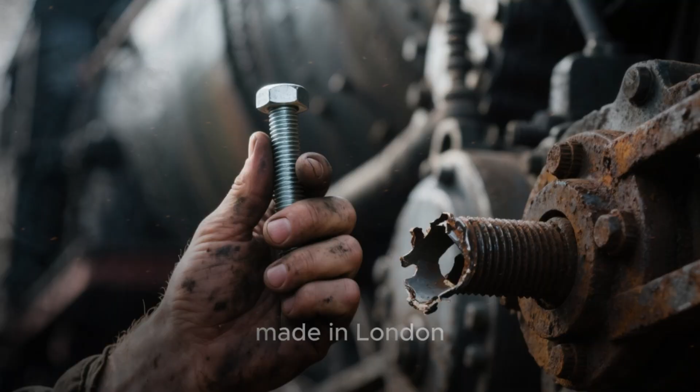Imagine a world where nothing fits. It's 1830. A steam locomotive breaks down in a remote village. The engineer reaches for a spare bolt, but it's useless. His bolts were made in London. The engine was built in Manchester. In this era, every screw was a unique work of art, which made the industrial world a logistical nightmare. This is the story of how we traded that artistic chaos for the beautiful, sleepy comfort of the standard.

Before we dive into the dusty archives of the 1841 Whitworth proposal, I want you to settle in. Imagine the sound of a heavy iron lathe in a workshop in 19th century England. The steady, rhythmic shaving of metal. The smell of oil and cold steel. We are going to slow down time, one thread at a time.

Picture this. You're building that new bookshelf and a screw is missing. No problem, right? You just run to the hardware store and grab a new one. But imagine a world where that simple trip wouldn't solve your problem. A world where every single screw is one of a kind. Welcome to the early 19th century, the era of what we'll call mongrel threads. Before 1841, standardization as we know it was basically science fiction.

If you were a blacksmith or a mechanic, you didn't just make a machine. You made every single bolt, nut, and screw that went into it. Each workshop was its own little kingdom, with its own unique system for creating fasteners. Your screws were your signature, and they wouldn't fit anything made by the guy in the next town over, or even the guy across the street.

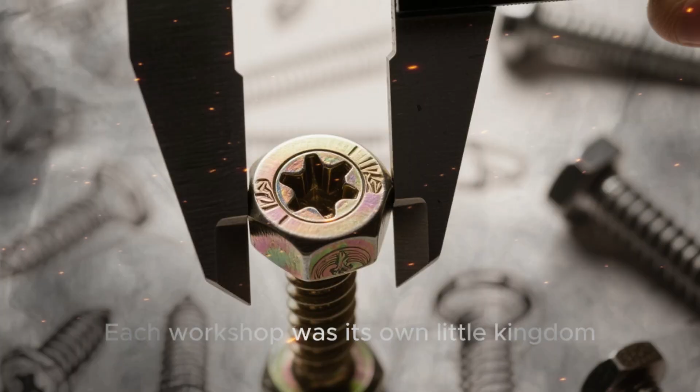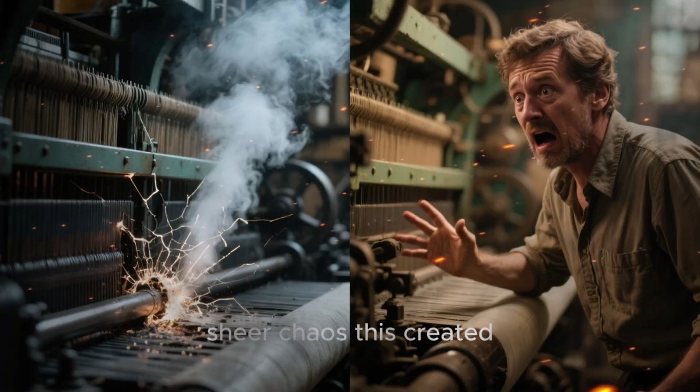Think about the sheer chaos this created. Let's say you're the proud owner of a brand new steam-powered loom. It's a marvel of engineering, weaving cloth faster than ever before. But one day, with a loud snap, a critical bolt breaks. The machine grinds to a halt. Your entire operation is down. What do you do? You can't just order a new replacement part. There's no catalog, no part number.

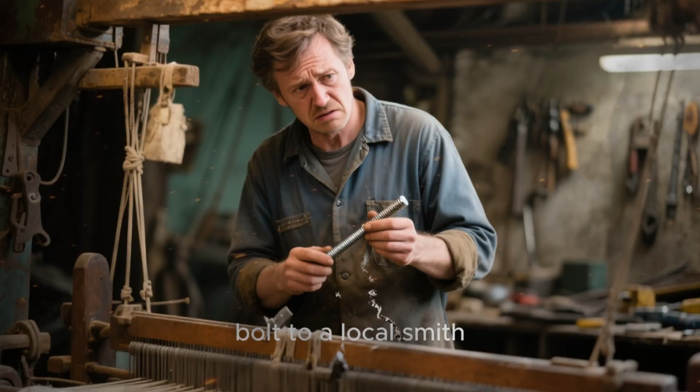Your only option is to call the original machinist who built the loom. If he's still in business, and if he's not too busy, he might be able to make you a new one. But more likely, you'd have to take the broken bolt to a local smith. This craftsman would then have to painstakingly measure the hole, guess the thread pattern, and hand file a brand new bolt from a solid piece of metal. This wasn't a quick job. It could take hours, even days, of meticulous labor, all while your expensive machine sits idle, losing you money every second. This was the quiet, inefficient world of custom everything.

Interchangeability was just a dream. Every repair was a custom job. Every machine was an island, filled with unique components that had no twins anywhere else in the world. Now, expand that problem to a national scale. The Industrial Revolution was in full swing. Railroads were stretching across the country, connecting cities and transforming economies. A locomotive was an incredibly complex machine, made of thousands of individual parts, including countless bolts and screws.

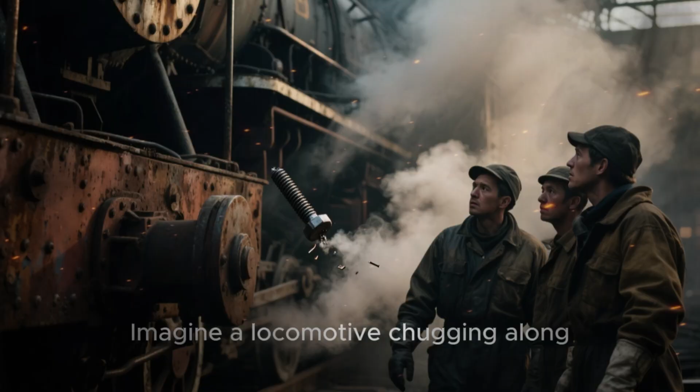Imagine a locomotive chugging along, hundreds of miles from its home workshop. A bolt rattles loose and falls off. Or worse, it shears under the immense pressure. The engine is crippled. The crew is stranded in the middle of nowhere. What's the plan? They can't just radio for a spare part to be sent. Even if they could, the spare part from another locomotive wouldn't fit.

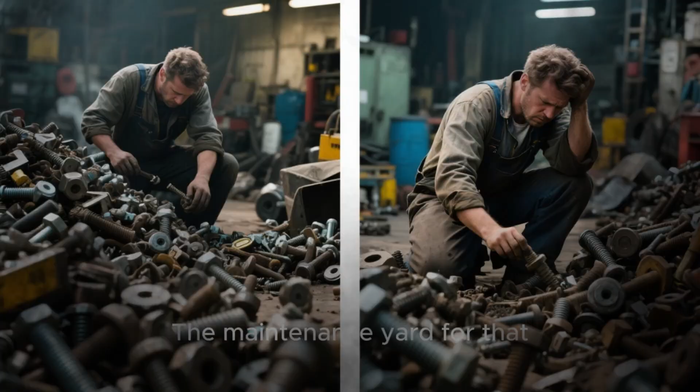The maintenance yard for that railroad would be a logistical nightmare. Instead of bins of standardized bolts, they'd have a massive, disorganized collection of custom-made fasteners from every locomotive they owned. When a repair was needed, a mechanic would have to sift through this mountain of metal, hoping to find a close match. And if they couldn't find one, you guessed it, they'd have to fire up the forge and make a new one from scratch.

The dream of a truly connected industrial nation was being held back by something as small and seemingly insignificant as a screw thread. This problem wasn't just limited to big machines like trains and looms. It affected everything, from scientific instruments to household clocks, from firearms to farm equipment. If something broke, fixing it was a massive ordeal.

There was no shared language of mechanics, no universal standard that allowed parts from one place to work in another. The world was filled with these mongrel threads, a chaotic mix of shapes, sizes, and pitches. Each one was an invention of necessity, born in a specific workshop for a specific purpose. While this system showcased the skill of individual craftsmen, it was horribly inefficient on a larger scale. It stifled innovation, complicated repairs, and made mass production almost impossible.

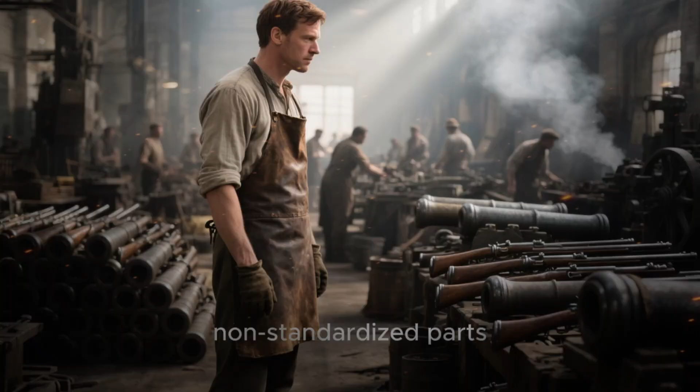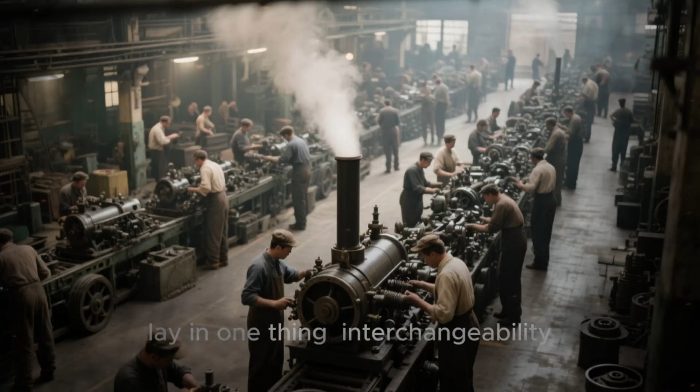He started his career at the Royal Arsenal, where he saw firsthand the chaos of non-standardized parts. Imagine trying to repair a cannon or a musket in the heat of battle, only to find that the replacement screw doesn't fit. It was inefficient, it was frustrating, and for Maudslay, it was an engineering problem that simply had to be solved. He knew that the key to mass production, the key to a modern industrial world, lay in one thing: interchangeability. And the key to interchangeability? The perfect, repeatable, identical screw thread.

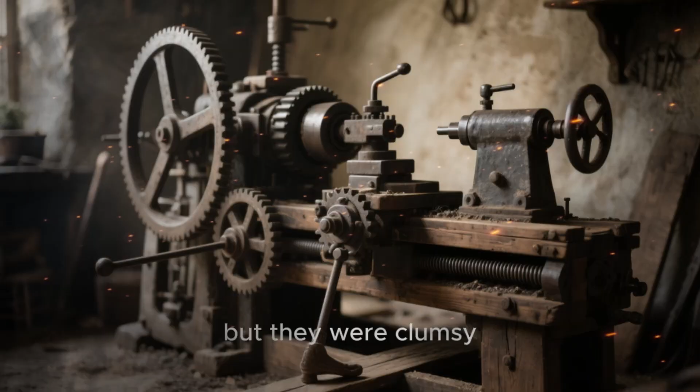But how do you create identical threads? You can't do it by hand. The human hand, no matter how skilled, will always introduce tiny imperfections. One craftsman's fine thread is another's coarse. What Maudslay envisioned was a machine that could cut threads with unwavering mathematical precision. The existing lathes were a start, but they were clumsy. The cutting tool was often held by hand, guided by sight and feel alone. It was more art than science.

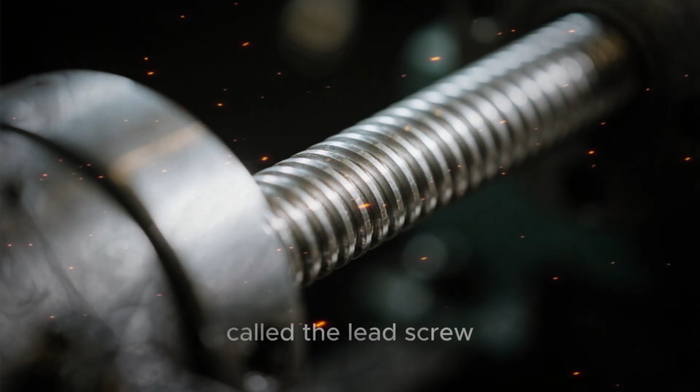Maudslay's genius was to take this existing technology and perfect it, transforming it into a machine of unparalleled accuracy. His creation, the screw-cutting lathe, is one of the unsung heroes of the modern age. Let's break down what made his lathe so special. The heart of the machine was something called the lead screw. This was a master screw, crafted with the utmost care, that ran the length of the lathe bed.

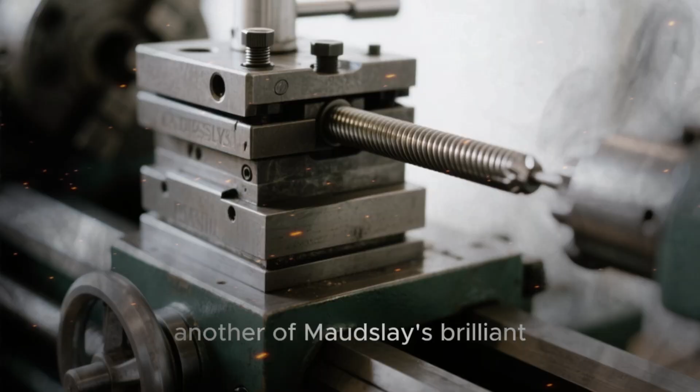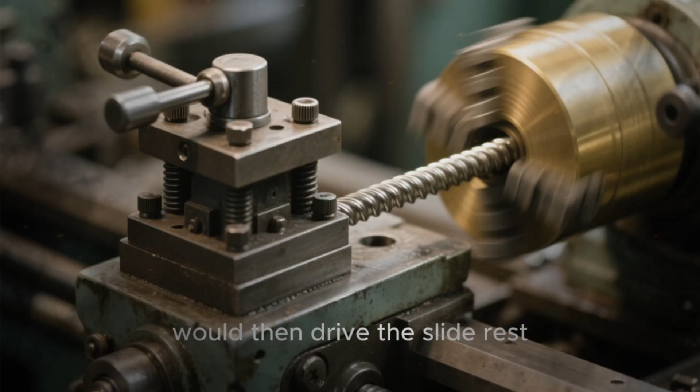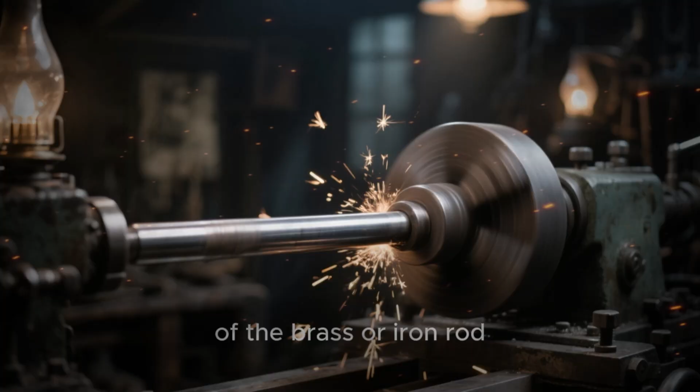Connected to this lead screw was the slide rest, another of Maudslay's brilliant innovations. The slide rest held the cutting tool in a rigid, unyielding grip. As the main spindle of the lathe turned the piece of metal you wanted to thread, a set of gears would turn the lead screw at a precise, related speed. This rotation of the lead screw would then drive the slide rest and the cutting tool steadily and smoothly along the workpiece. Picture it. The rhythmic hum of the machine, the steady rotation of the brass or iron rod, and the slide rest, moving with a slow, meditative, almost hypnotic grace.

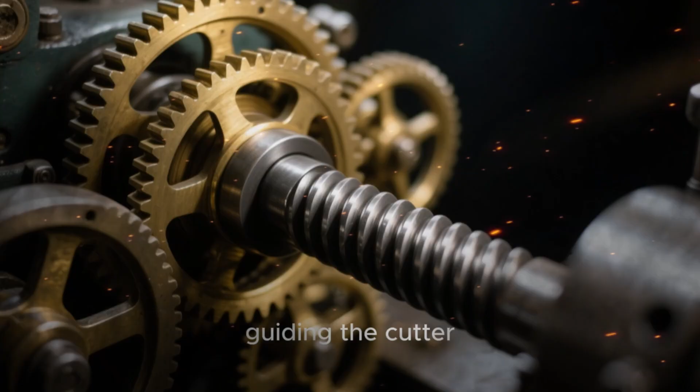It wasn't a human hand guiding the cutter. It was the cold, hard logic of gears and the perfect geometry of the lead screw. With each pass, the tool would bite into the metal, carving a helical groove. Another pass, a little deeper, and another. The result was a thread not born from estimation, but from calculation. A thread that was a perfect physical manifestation of a mathematical ratio.

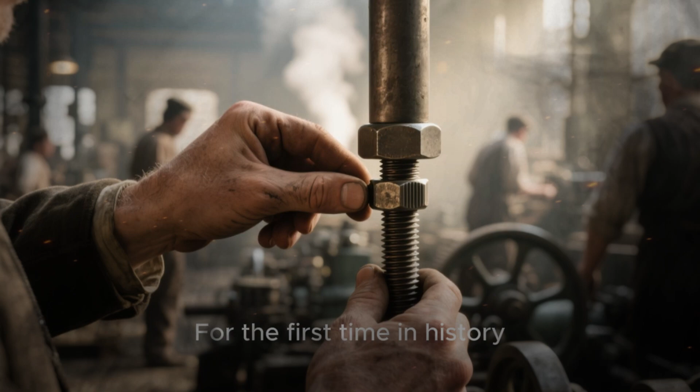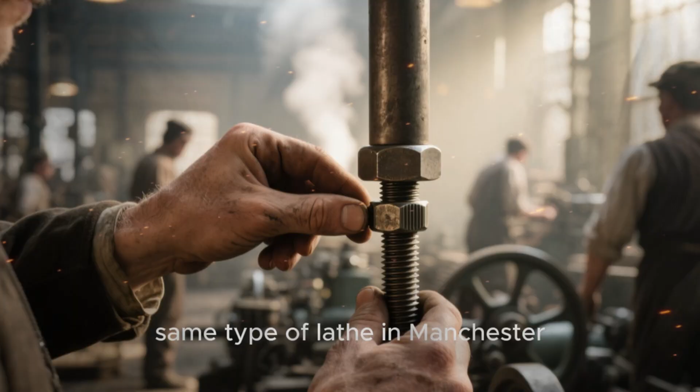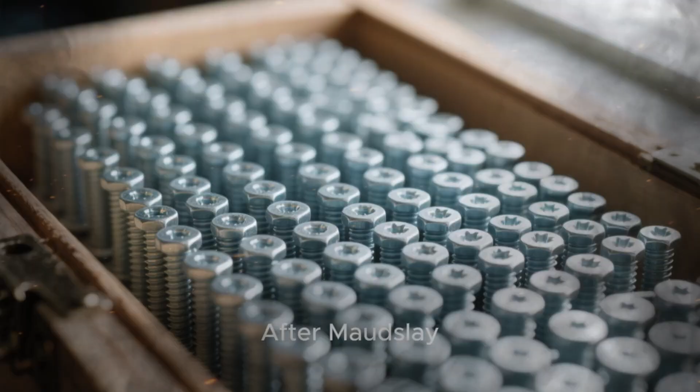For the first time in history, you could produce a screw in London and know with absolute certainty that it would fit a nut made on the very same type of lathe in Manchester, or Birmingham, or even one day across the ocean. This was the birth of consistency. Before Maudslay, every screw was an individual, a one-of-a-kind piece. After Maudslay, the screw became a commodity, a standard component.

The implications were staggering. Think about it. Suddenly, you could build complex machines with replaceable parts. A steam engine, a printing press, a textile loom. If a part broke, you didn't have to custom fabricate a new one. You could simply order a replacement. This dramatically lowered the cost of manufacturing and repair, and it accelerated the pace of innovation like nothing before.

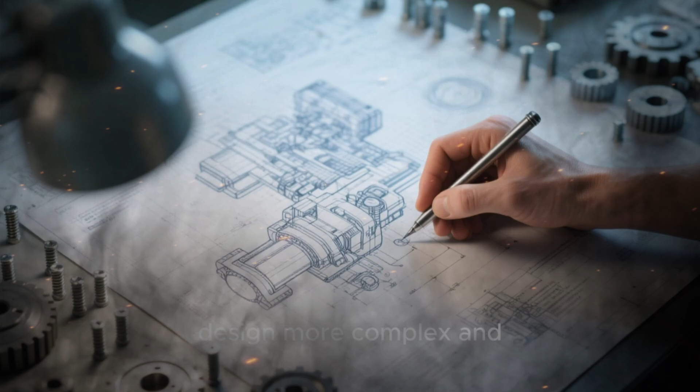Inventors and engineers were now free to design more complex and ambitious machines, knowing that the components to build them could be reliably produced. Maudslay's workshop became a legendary training ground for the next generation of engineers. Men like Joseph Clement and the great Joseph Whitworth passed through its doors, learning the gospel of precision from the master himself. They took Maudslay's principles and built upon them, further refining the machines and, crucially, beginning the push for a national and eventually international standard for screw threads.

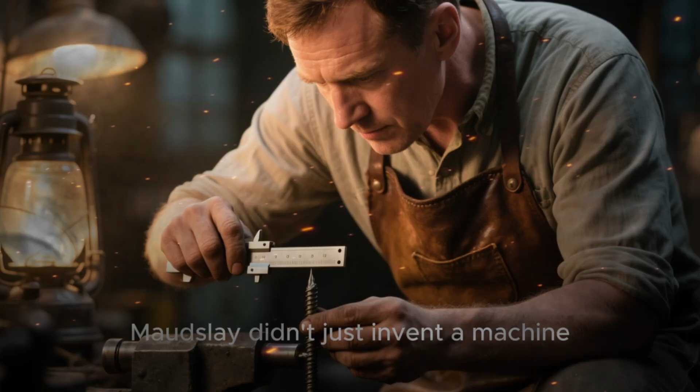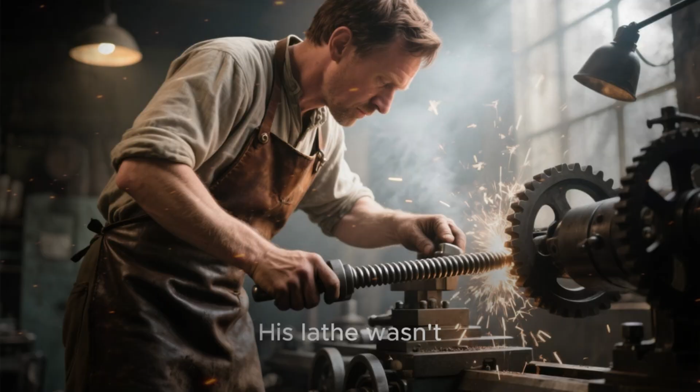Maudslay didn't just invent a machine. He created a new way of thinking. He instilled a culture of precision that became the bedrock of the Industrial Revolution. His lathe wasn't just cutting metal, it was carving the shape of the future. It was a quiet revolution happening not on a battlefield, but in the noisy clatter of a workshop, one perfect thread at a time. This new capability, this power to create perfect, interchangeable threads on demand, set the stage for the next great chapter in our story.

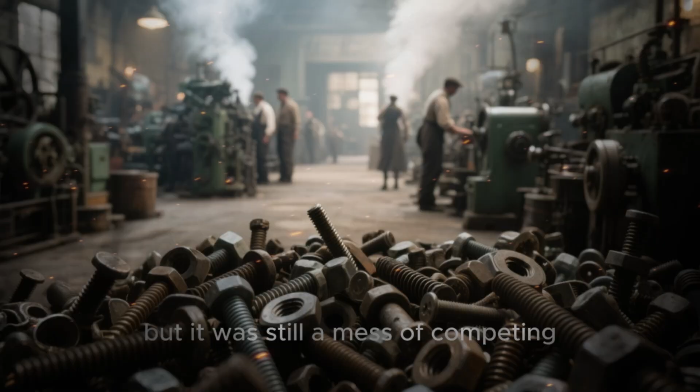With the how now solved, the question became what? What size should the threads be? What angle? What pitch? The world had a tool for creating order, but it was still a mess of competing proprietary thread designs. The battle for standardization was just beginning, and it would be a hard-fought one.

Alright, so we've established that the world before standardized screws was a chaotic mess. Every workshop, every craftsman, was basically making it up as they went along. Bolts from one place wouldn't fit nuts from another, and repairs were a total nightmare. The Industrial Revolution was revving its engines, but it was being held back by this tiny yet massive problem. The world was crying out for a hero, a champion of standardization, and it found one in a man named Joseph Whitworth.

Now, picture this. It's the 1830s. Steam trains are starting to crisscross the English countryside. Factories are belching smoke, and the world is changing faster than ever before. In the middle of all this, Joseph Whitworth, a brilliant toolmaker and engineer, decides to take on the screw problem. But how do you even begin to standardize something that has infinite variations? You can't just declare, my screw is the best screw. You need data. You need evidence.

So Whitworth embarked on what must have been one of the most mind-numbingly tedious, yet incredibly important, quests in engineering history. He began a grand tour of England, visiting every major workshop he could find. He wasn't there to admire the machinery or chat with the foreman. He was there on a mission. He was there to collect screws. Just imagine him walking into a bustling factory, a place of intense heat and noise, and saying, "Good day, sir. I'm here to take a sample of your screws." He probably got some very strange looks.

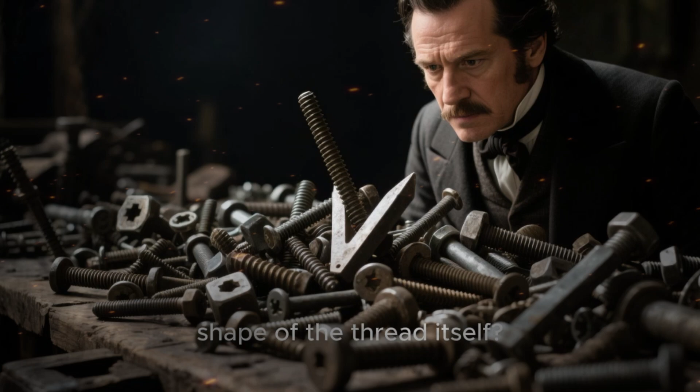But what about the shape of the thread itself? The angle of that V-groove? This was another area of total chaos. Some threads were sharp and pointy. Others were more rounded. Sharp threads were weak and easily damaged. Square threads were stronger, but much harder to make. Whitworth needed a compromise, a shape that was both strong and relatively easy to manufacture with the tools of the day. Again, he turned to his mountain of data.

He measured the angles on all his sample screws. The angles were all over the place. 45 degrees, 60 degrees, anything you can imagine. After measuring and analyzing countless threads, he calculated the average, and the number he landed on was 55 degrees. It wasn't a nice round number like 60, but it was what the data told him. The 55-degree angle was the sweet spot.

To further improve the design, he made one more crucial tweak. Instead of having the V-groove come to a sharp point at the top and bottom, he rounded it off. This was a masterstroke. A sharp point is a natural weak spot, a place where a fracture is likely to start. By rounding the crest and root of the thread, he made the entire screw significantly stronger and more resistant to stripping and damage. It also made them easier to make, as cutting a perfect sharp V is much harder than cutting a slightly rounded one.

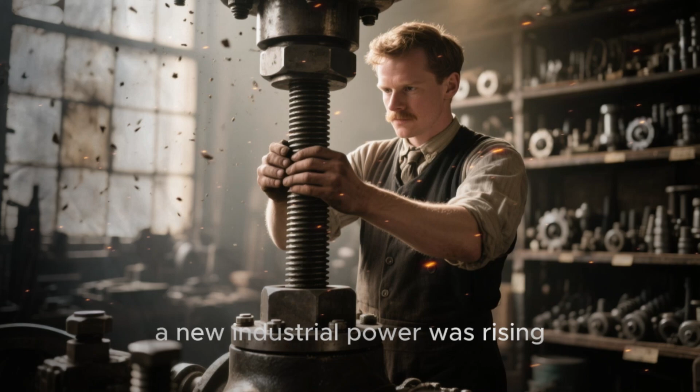For the first time in history, a mechanic in London could be certain that a half-inch nut would fit a half-inch bolt, regardless of where either part was made. It was a revolution. It streamlined manufacturing, simplified repairs, and dramatically increased the reliability of machines. Joseph Whitworth hadn't just invented a screw thread. He had introduced a new way of thinking, an idea that components could and should be interchangeable. And this idea would go on to change the world in ways even he couldn't have imagined. But while Britain was busy standardizing, a new industrial power was rising across the Atlantic, and they had their own ideas about how to make a screw.

And that's where our story will go next. You know, for something we see every day, screws have a surprisingly dramatic and opinionated history. We talked about the birth of standardized threads.

Now, we're diving into the great international screw thread debate, the Battle of the Angles. It's the British versus the Americans, 55 degrees versus 60 degrees. This might sound like a tiny detail, but this 5-degree difference tells a story of national pride, industrial philosophy, and a quest for perfection. So grab your calipers and let's get into the nitty-gritty of screw thread geometry.

On one side of the Atlantic, we have the British and their champion, Joseph Whitworth. As we discussed, his system, established in 1841, was the world's first national standard. The defining feature of a Whitworth thread is its 55-degree flank angle, with rounded roots and crests. Think of the thread profile as a series of rolling hills.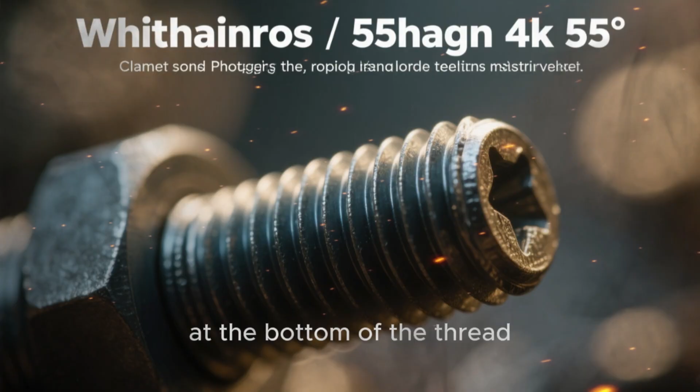Whitworth's reasoning for this was brilliant. The rounded design was meant to reduce stress concentrations at the bottom of the thread, making the bolt stronger and less likely to crack under pressure. It also created a tighter seal, which was fantastic for applications involving steam or fluids, a huge deal in the age of steam engines. The rounded tops and bottoms were also less prone to damage during handling and assembly.

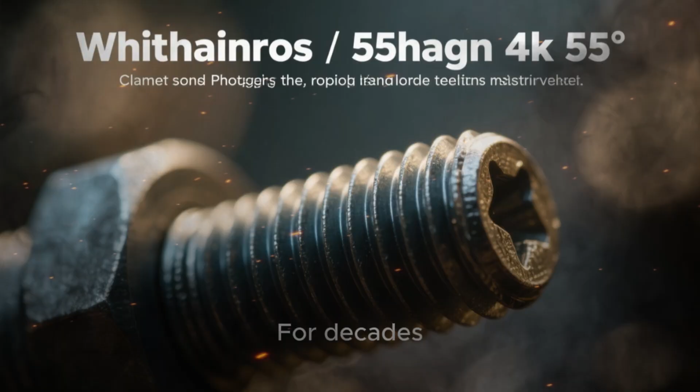It was a robust, well-thought-out design that quickly became the standard not just in Britain, but across much of the world. For decades, if you were building a bridge, a ship, or a locomotive, you were likely using Whitworth threads. It was the undisputed king. But as with all great empires, a challenger was rising in the West.

Across the pond, American industry was booming. They were initially using a chaotic mix of threads, including Whitworth, but a desire for a uniquely American system was growing. Enter William Sellers. In 1864, he presented his own thread standard to the Franklin Institute in Philadelphia. His design was different in a few key ways.

Most famously, it featured a 60-degree flank angle. Instead of rounded tops and bottoms like Whitworth's, the Sellers thread had flat crests and roots. The profile looked more like a series of trapezoids than rolling hills. Now, why the change? Was 60 degrees inherently better than 55? Not necessarily. The real genius of Sellers' design was its manufacturability.

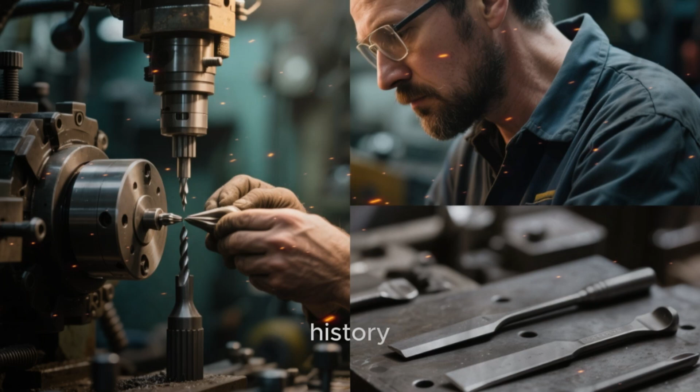This is where we get into what some might call boring history, but I think it's fascinating. It's all about the machinist on the factory floor. To cut a Whitworth thread with its precise, rounded profile, you needed special tooling. Creating those rounded cutting tools was a skilled art form in itself. It was time-consuming and required a high level of craftsmanship.

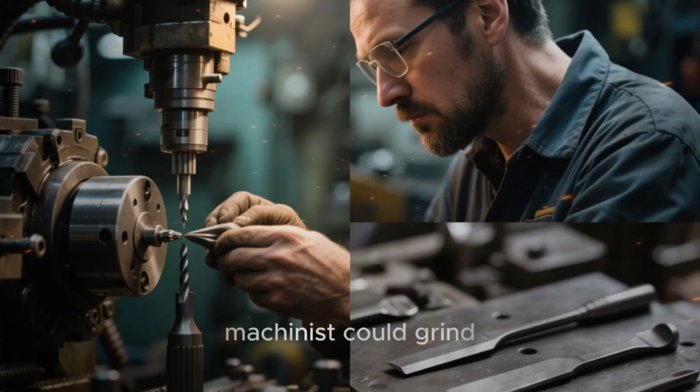William Sellers looked at this and thought, there has to be a simpler way. His 60-degree angle with flat tops and bottoms was a game-changer for production. Why? Because you could create the cutting tool with simple, straight-sided geometry. Any competent machinist could grind a tool bit to a perfect 60-degree point. It was easier, faster, and cheaper to produce.

This wasn't just about a different shape. It was a different philosophy. Whitworth prioritized the theoretical strength and sealing of the final product. Sellers prioritized the ease and economy of making that product in the first place. This focus on mass production was quintessentially American. It was a system designed for a rapidly industrializing nation that needed to make things quickly and efficiently.

So the stage was set for a showdown. The British system, with its 55-degree rounded threads, was the established global standard, celebrated for its strength and reliability. The American system, with its 60-degree flat-top threads, was the up-and-coming challenger, designed for speed and ease of manufacturing.

This wasn't just an engineering debate. It was an economic and philosophical one. On one hand, you have the meticulous, craft-driven approach of the old world. On the other, the pragmatic, production-focused mindset of the new world. And for nearly a century, these two systems would compete, coexist, and cause endless headaches for anyone trying to repair a British car with American tools, or vice versa.

The incompatibility was a massive problem. Imagine being a mechanic and having two sets of wrenches, two sets of taps and dies, and two sets of fasteners that looked almost identical, but were fundamentally incompatible. It was a logistical nightmare.

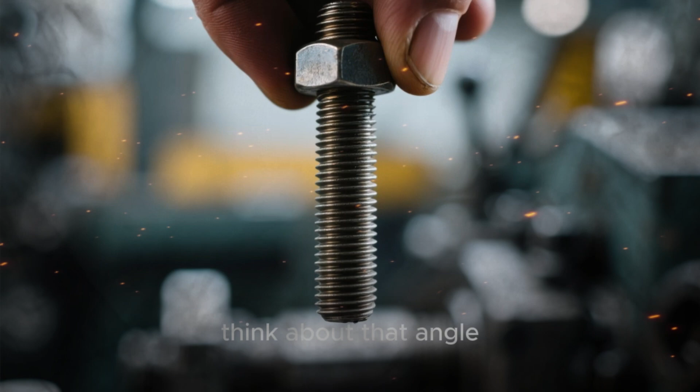So the next time you see a bolt, think about that angle. Is it a 55-degree echo of the British Empire, or a 60-degree testament to American industrial might? It's amazing how a tiny 5-degree difference can tell such a big story about history, technology, and the different ways we approach solving a problem. This whole saga really shows that in engineering, there's rarely a single right answer. There are just different solutions with different trade-offs.

Alright, so we've seen how messy things were before Whitworth came along. But how does a good idea actually take over the world? Well, it often needs a little push from a big industry. And in the 19th century, there was no industry bigger, faster, or more revolutionary than the railways.

Imagine Britain in the 1830s and 40s. A railway mania is sweeping the nation. Tracks are being laid at a furious pace, connecting cities, towns, and ports like never before. It was the internet of its day, a massive, sprawling network that was changing everything. But this network had a huge, hidden problem. Each railway company was its own little kingdom.

You had the Great Western Railway, the London and North Western, the Midland Railway, dozens and dozens of them. And each one built its own locomotives, its own carriages, its own everything. And you guessed it, they all used their own unique, non-standardized nuts and bolts.

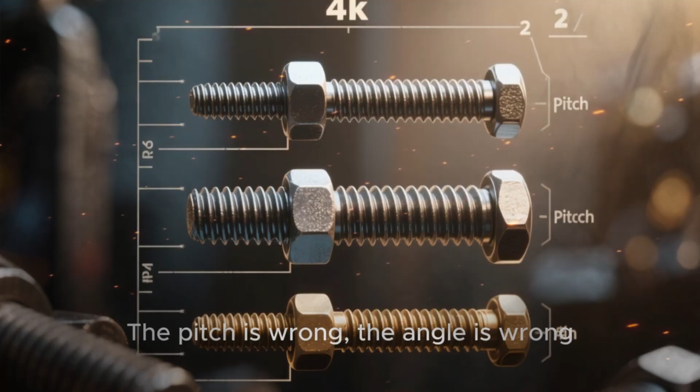Why? Because the threads are all different. The pitch is wrong, the angle is wrong. The diameter is a fraction of an inch off. This wasn't a rare occurrence. It was a daily nightmare. A train, this marvel of modern engineering, worth thousands of pounds and carrying vital goods or impatient passengers, could be rendered completely useless by a single 10-penny bolt.

The solution? It was absurdly inefficient. The broken train would have to wait, sometimes for days, for a specific, custom-made part to be shipped from its home workshop, maybe hundreds of miles away. Or the local mechanics would have to fire up their forge and try to handcraft a replacement bolt on the spot, a time-consuming and often imprecise process.

The cost of this was staggering. It wasn't just the price of the repair. It was the cost of the delay. An entire railway line could be blocked. Goods would spoil. Business deals would be missed. Passengers would be furious. All that incredible speed and efficiency promised by the railway could grind to a halt because of incompatible screws. Railway engineers and managers were tearing their hair out.

They were practical people, obsessed with efficiency and timetables. This chaos was an affront to their very nature. They needed a system. They needed a standard. And that's where Joseph Whitworth's quiet revolution meets the roaring power of the steam engine. It wasn't a dramatic, headline-grabbing event. It was more of a slow, logical, administrative creep.

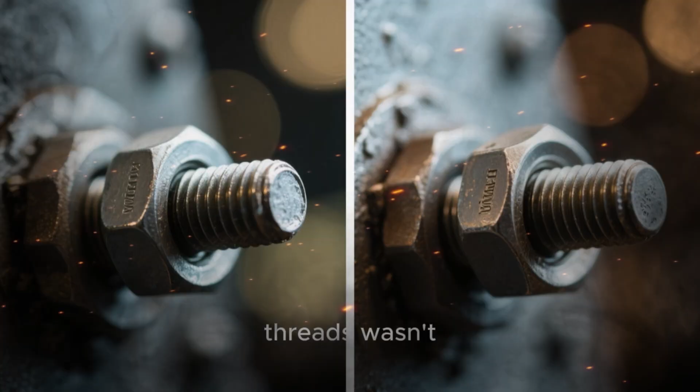Railway companies started talking to each other. Engineers from competing lines met and shared their frustrations. And one name kept coming up: Whitworth. His system of standardized threads wasn't just a theory anymore. It was a proven, practical solution being used in the best workshops.

The change started small. A few forward-thinking railway lines began specifying Whitworth threads for all new locomotives and rolling stock they ordered. They told their suppliers, the big engineering firms like Robert Stephenson and Company, that all bolts, nuts, and screws had to conform to the Whitworth standard.

The benefits were immediate and obvious. Now, a locomotive could be repaired at any major station along its route, regardless of which company owned the station. A mechanic in Bristol could fix a train from Manchester using a standard bolt straight from his parts bin.

The massive, complex logistical headache of stocking thousands of unique, company-specific spare parts began to disappear. Instead of needing a dedicated storeroom for every single type of locomotive they serviced, workshops could now have a single, universal set of fasteners. This was a logistical victory of immense proportions. It dramatically reduced inventory costs, simplified maintenance, and, most importantly, slashed downtime. Trains were kept running, schedules were met. The entire network became more reliable, more efficient, and more profitable.

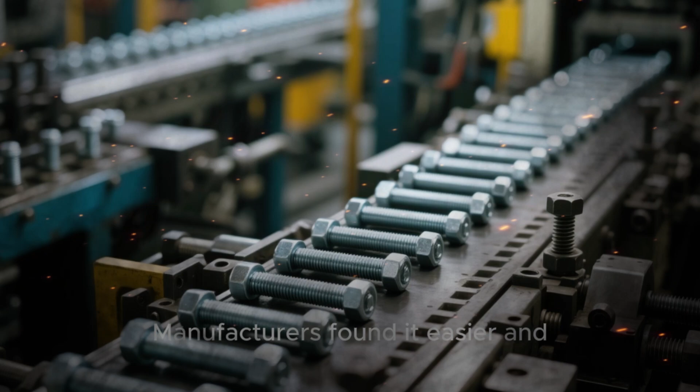This process created a powerful feedback loop. As more railways adopted the Whitworth standard, it became the default. Manufacturers found it easier and cheaper to produce one standard type of bolt rather than dozens of custom varieties. It was a classic case of network effects. The more people who used the standard, the more valuable the standard became for everyone.

By the 1860s, the battle was essentially over. The Whitworth thread had conquered the railways. It wasn't through a government decree or a dramatic invention. It was a quiet administrative decision, repeated across dozens of company boardrooms, driven by the simple, undeniable logic of efficiency and cost saving. The railway, the great connector of the physical world, had become the vehicle that carried standardization into every corner of British industry.

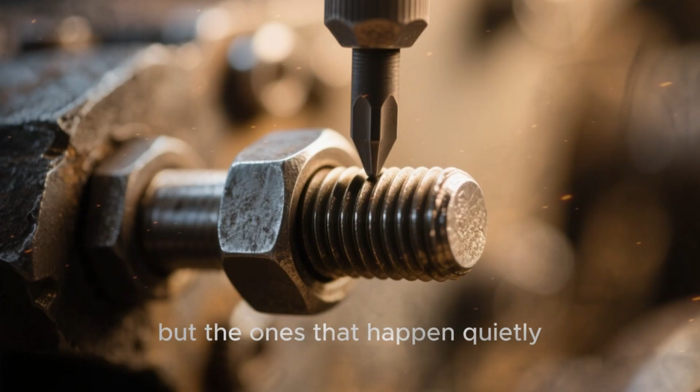This quiet victory on the railways laid the groundwork for everything that came next. The standard that fixed the trains would go on to build ships, bridges, factories, and eventually the entire modern industrial world. It's a powerful reminder that sometimes the most profound revolutions aren't the loud ones, but the ones that happen quietly in the background, one standardized bolt at a time.

Alright, let's pick up where we left off. So, we've seen how Britain and America, with their Whitworth and Sellers threads, were kind of going their own ways. But what about the rest of Europe? Well, a lot of them were looking at the metric system and thinking, this is the future. It's clean, it's logical, it's based on tens. Why can't we have a thread system that's just as sensible?

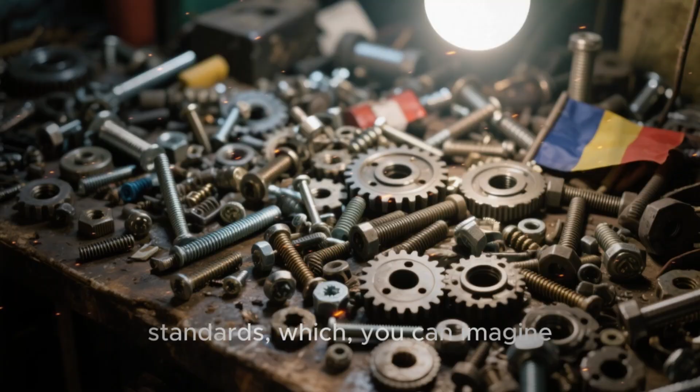This idea had been bubbling for a while. Various European countries had come up with their own metric thread standards, which you can imagine was just creating a whole new set of compatibility problems. It was like everyone speaking a different dialect of the same language. You could sort of understand each other, but it was messy. The need for a single, unified, international metric thread system was becoming painfully obvious.

So, in 1898, a bunch of the brightest engineering minds from across Europe decided to do something about it. They all packed their bags and headed to Zurich, Switzerland. This wasn't just any old meeting. This was the International Congress for the Unification of Screw Threads. Sounds grand, doesn't it? And it was. This was a pivotal moment, a chance to finally create a universal language for making things.

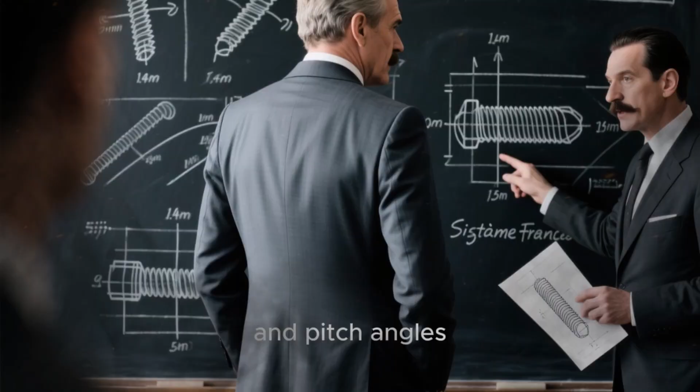Picture the scene, a conference hall in Zurich, filled with serious-looking men in starched collars and impressive mustaches. Engineers from France, Germany, Switzerland, and other nations, all gathered with a common goal. The air is probably thick with cigar smoke and the weight of expectation. They're not there to debate politics or art. They're there to argue about millimeters and pitch angles. It might sound dry, but for the industrial world, this was high drama.

The French delegation, predictably, was a huge proponent of the metric system. They'd been using it for over a century and had already developed their own metric thread, the Système Français. They came to Zurich hoping to convince everyone that their system was the best one to adopt. It was logical, based on a simple formula, and already in use.

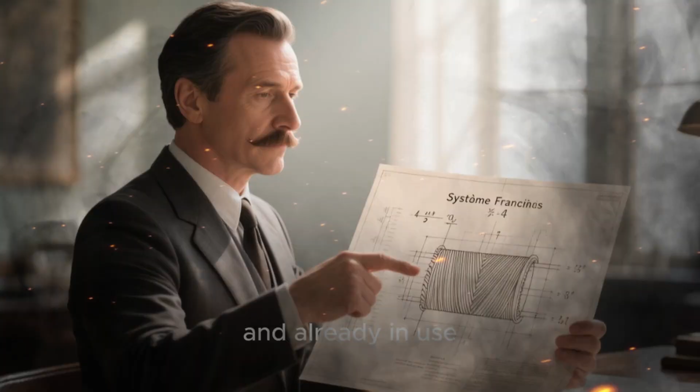But the Germans had other ideas. German engineering was on a meteoric rise, and they had been developing their own, slightly different metric thread standards. They weren't just going to roll over and accept the French system without a fight. They had their own data, their own theories on what made the most robust and efficient thread. So right away, you have this classic Franco-German rivalry playing out, not on a battlefield, but over the microscopic grooves on a piece of metal.

The Swiss, being the hosts and famously neutral, tried to act as mediators. They had their own thread standards too, of course, but their main interest was in finding a compromise that everyone could agree on. They knew that a fractured Europe, unable to even agree on how to make a bolt, was bad for business and bad for progress. So the debates began, and they were intense. These engineers would spend hours, days, hunched over technical drawings and charts.

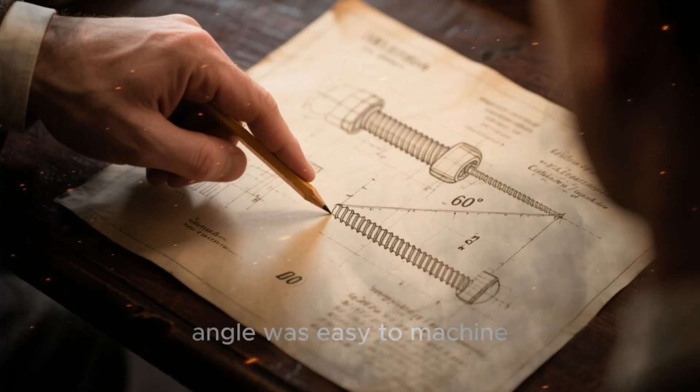They argued about the flank angle of the thread. Should it be 60 degrees, like the American Sellers thread, or something else? A 60-degree angle was easy to machine, which was a big plus. But was it the strongest?

Then there was the debate over the profile. Should the crest and root of the thread be flat, like the Sellers thread, or rounded, like the Whitworth? Flat crests were simpler to cut, but rounded ones were stronger and more resistant to stripping and fatigue. This was a huge point of contention. The French system had flat tops, but many engineers, remembering Whitworth's arguments, favored the durability of a rounded profile.

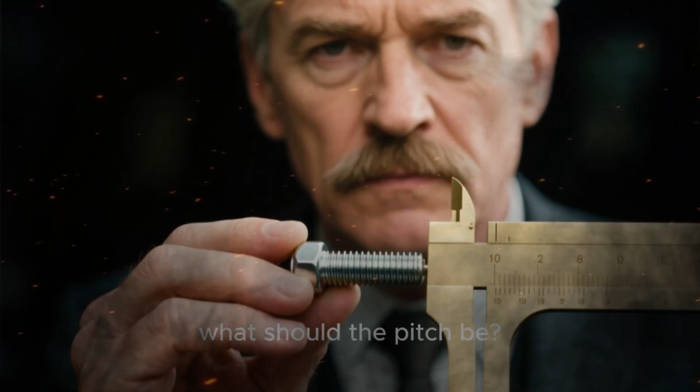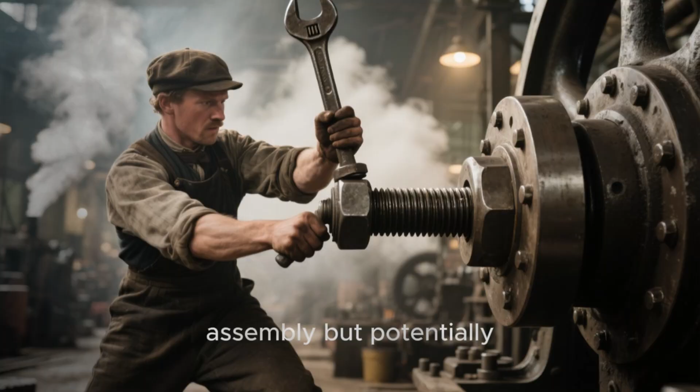And of course, the biggest debate of all, the specific combinations of diameter and pitch. This is the heart of any thread standard. For a given diameter, say 10 millimeters, what should the pitch be? 1 millimeter? 1.5? Every decision was a trade-off. A coarser pitch with fewer threads per inch meant faster assembly but potentially less clamping force and a weaker connection. A finer pitch was stronger but took longer to screw in and was more susceptible to damage and cross-threading.

They had to create a whole series of standard sizes, from tiny screws for watches and scientific instruments, all the way up to massive bolts for steam engines and bridges. Each size needed its own perfectly chosen pitch. The delegates would propose a set of numbers, and then the arguments would start. "That pitch is too fine for a 12-millimeter bolt. It will strip under load," one engineer might exclaim. "But your proposal is too coarse. It won't provide enough clamping force for high-pressure applications."

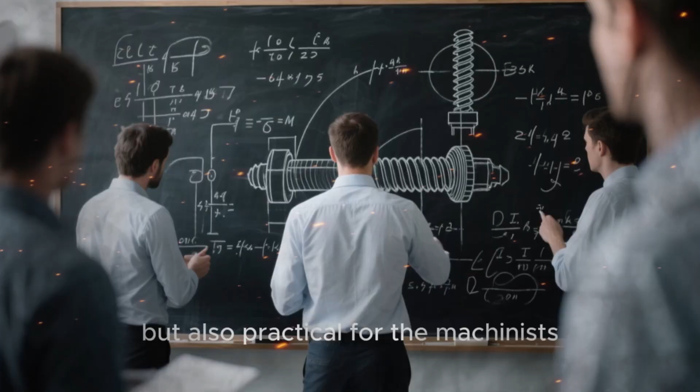Another would retort. These weren't just opinions. They were backed by calculations, experiments, and years of practical experience. They were trying to create a system that was not just theoretically sound, but also practical for the machinists on the factory floor. It had to be easy to manufacture, easy to inspect, and reliable in the field.

While these engineers were locked in their stuffy conference room, the world outside wasn't waiting. The second industrial revolution was in full swing. Factories were churning out new machines, automobiles were just starting to appear on the roads, and the first airplanes were only a few years away from taking flight. All of this new technology depended on fasteners, on millions and millions of nuts and bolts. The pressure to come to an agreement was immense.

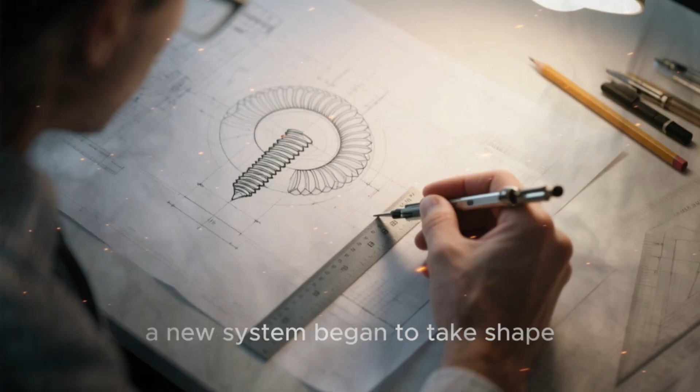After days of intense negotiation, haggling, and redrawing proposals, they started to find common ground. It was a process of give and take. Maybe the French would concede on a particular pitch size if the Germans agreed to a specific thread angle. Slowly, painstakingly, a new system began to take shape. They agreed on a 60-degree flank angle, a compromise that took the best from the American system's ease of manufacturing.

And for the profile, they made a crucial decision. Instead of a fully rounded root and crest like Whitworth, or a fully flat one like Sellers, they created a hybrid. The new international metric thread would have a flat crest, but a rounded root. This was a brilliant compromise. The flat crest was easier to make, while the rounded root provided that all-important strength and resistance to fatigue cracking where the stress is highest.

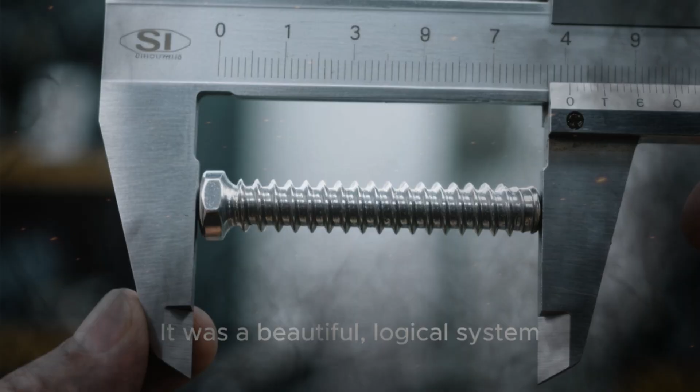Finally, they hammered out a comprehensive table of diameters and pitches. This became known as the Système International, or SI thread. It was a beautiful, logical system. For the most part, the pitch was directly related to the diameter in a simple way. It was everything the metric system was supposed to be: rational, standardized, and universal.

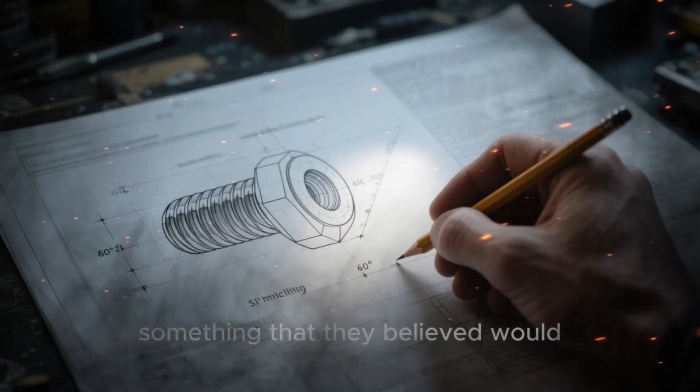The delegates at the 1898 Zurich Congress left feeling triumphant. They had created something that they believed would change the world. They had laid the foundation for a truly global manufacturing standard. They published their findings, and the new SI metric thread standard was born. But as we've learned, creating a standard is one thing. Getting everyone to actually use it is a completely different battle.

The proposal from Zurich was elegant and well thought out, but it wasn't an international law. Countries, and more importantly, individual companies, had to choose to adopt it. And that process, as you might guess, was going to be anything but simple. The British and the Americans, with their massive industrial might and their own established inch-based systems, were watching from the sidelines. They weren't at the Zurich Congress, and they weren't about to abandon their systems overnight. The thread wars were far from over. In fact, they were about to get even more complicated. We'll dive into that messy adoption process and the resistance the new metric standard faced in our next part.

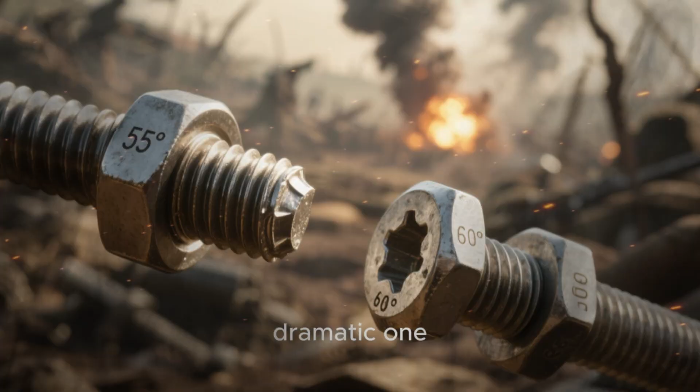The story of screw threads is a surprisingly dramatic one. We talked about how brilliant engineers like Whitworth and Sellers tried to bring order to the chaos of fasteners. They created standards, hoping to make life easier for everyone. But as the world barreled into the 20th century, bringing with it 2 devastating world wars, it became painfully clear that their dream of universal compatibility was far from reality. And on the battlefield, this wasn't just an inconvenience, it was a matter of life and death.

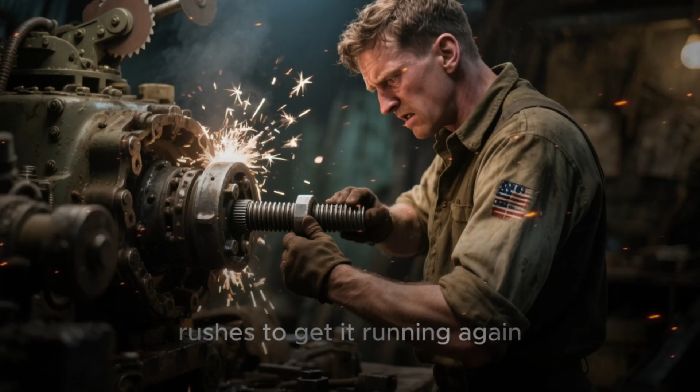Imagine this. It's World War II. A British tank, a crucial piece of machinery on the front lines, has broken down. An American engineering corps, brave and skilled, rushes to get it running again. They open up the engine compartment, tools in hand, ready to replace a damaged part. They find the right size bolt, or so they think.

They try to screw it in. It goes in a little, then stops. It won't tighten. They try another. Same problem. The American-made bolts simply will not fit the British-made engine. Why? Because the threads are different. The American bolt has a 60-degree thread angle, and the British one has a 55-degree angle. They are fundamentally incompatible. This wasn't a rare occurrence.

This was a daily, infuriating, and dangerous reality for the Allied forces. While soldiers were fighting on the front, engineers were fighting their own battle against incompatible parts. Every piece of equipment, from planes and tanks to jeeps and rifles, was a complex puzzle of nuts and bolts.

The United States, the arsenal of democracy, was churning out incredible amounts of machinery and spare parts to support the war effort. But when those American-made parts arrived in Europe or the Pacific, they often couldn't be used to repair British or Canadian equipment. The logistical nightmare was staggering. You couldn't just send a box of half-inch bolts to the front. You had to send a box of American half-inch bolts and a separate box of British half-inch bolts. This meant double the inventory, double the shipping weight, and double the confusion.

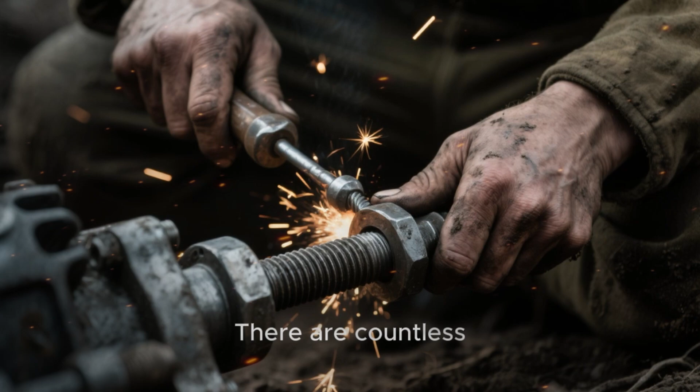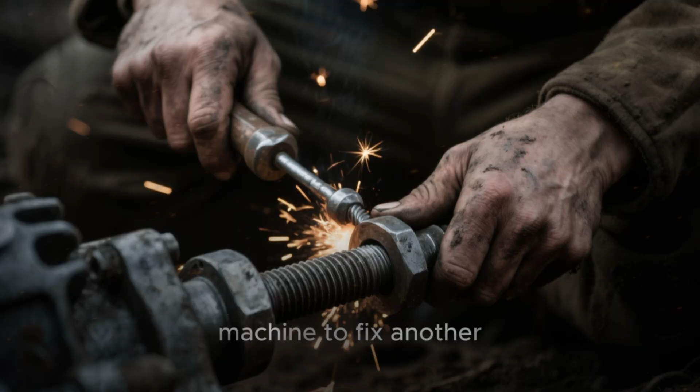There are countless stories of mechanics having to retap threads in the field, a difficult and time-consuming process, or even cannibalizing parts from one broken-down machine to fix another. This wasn't efficient. It wasn't sustainable. It was a crisis born from a simple, overlooked detail, the shape of the groove on a piece of metal.

Even before the Second World War, during World War I, this issue had already reared its ugly head. The lack of a common standard between the U.S. and its allies had caused significant delays and inefficiencies. Committees were formed, discussions were had, but little progress was made. The problem was just seen as a technical annoyance, not the critical strategic weakness it truly was.

But by World War II, the scale of the problem was too big to ignore. The sheer volume of international cooperation required to fight a global war made the screw thread issue a top-level concern. High-ranking officials in Washington and London realized that their armies were being hamstrung by something as mundane as a bolt.

It was William L. Batt, an American industrialist and key figure in the War Production Board, who really championed the cause. Having witnessed the chaos firsthand, he relentlessly pushed for a solution. He argued that a common standard was not just a matter of convenience. It was a matter of national security and military effectiveness. He organized conferences and brought together engineers, manufacturers, and military leaders from the United States, Great Britain, and Canada.

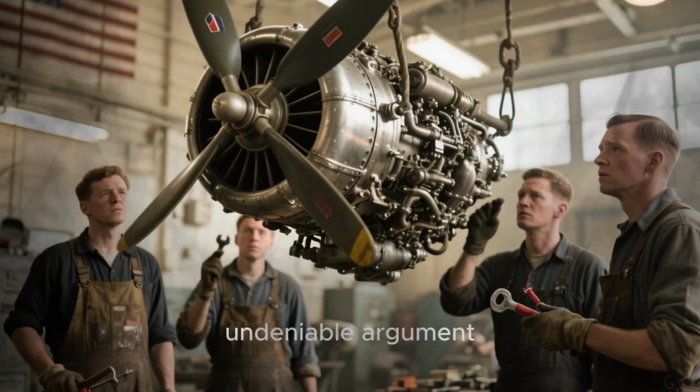The initial meetings were tense. Decades of industrial habit and national pride were at stake. The British were proud of their Whitworth standard, with its 55-degree angle, which they believed held better under vibration. The Americans were equally committed to their Sellers standard, with its 60-degree angle, which was easier and cheaper to manufacture. For either side to give way felt like admitting their own system was inferior. But the war provided a powerful, undeniable argument. Story after story from the front lines highlighted the absurdity of the situation.

Imagine a brand new Rolls-Royce Merlin engine, the powerhouse of the Spitfire and Mustang fighters, being shipped from Britain to an American maintenance depot. The American mechanics, some of the best in the world, would be practically helpless if they didn't have the specific British threaded tools and fasteners. The engine might as well have been a sealed box.

Slowly, painstakingly, a compromise began to take shape. The engineers went back to basics. They analyzed the strengths and weaknesses of both systems. The goal was to create a new standard that would be a true hybrid, taking the best features of both the Whitworth and the Sellers threads. It had to be strong, reliable, and easy to manufacture. After years of negotiation, calculation, and testing, a breakthrough was finally achieved.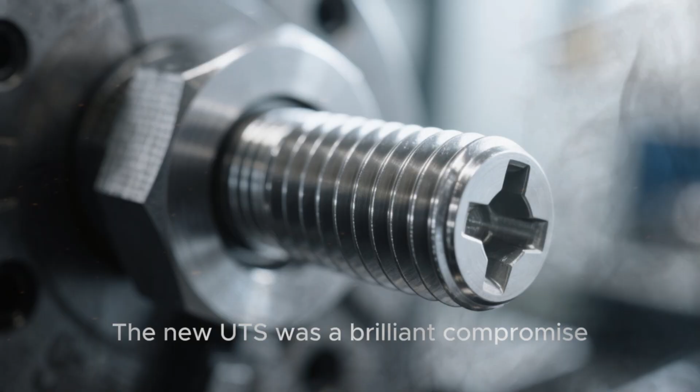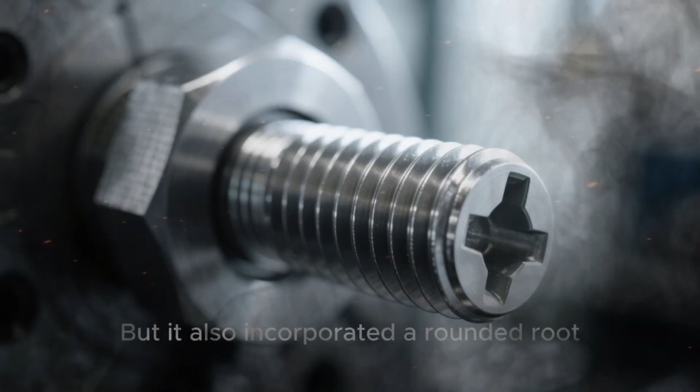In 1949, shortly after the war ended, representatives from the United States, the United Kingdom, and Canada met in Washington, D.C. and signed an accord. This agreement established the Unified Thread Standard, or UTS. The new UTS was a brilliant compromise. It adopted the 60-degree thread angle from the American Sellers profile, which made it easier to mass produce, but it also incorporated a rounded root, similar to the British Whitworth design, which improved its fatigue resistance and made it stronger. It was the best of both worlds, a standard forged in the fires of conflict and cooperation.

The adoption of the Unified Thread Standard was a landmark moment in the history of engineering. It was a recognition that, in an increasingly interconnected world, collaboration and standardization are not just good ideas, they are essential. The logistical chaos of World War II served as a harsh but necessary lesson. Today, if you walk into a hardware store in North America and pick up a bolt, chances are it uses the Unified National Coarse, UNC, or Unified National Fine, UNF thread, both of which are part of the UTS. This standard has become the backbone of manufacturing and construction across a huge portion of the globe.

But the story doesn't end there. As the world was unifying its imperial threads, another system was quietly gaining ground. A system based on an entirely different way of thinking about measurement, the metric system. In our next video, we'll dive into the rise of the metric thread standard and the ongoing thread war that continues to this day. It's a battle of millimeters versus inches, and it affects everything you use, every single day.

We talked about how Whitworth's imperial thread system and the metric system caused a huge mess during World War II, leading to tragic equipment failures and loss of life. After the war, everyone realized this couldn't go on. The world needed a single, unified standard. So, in the quiet aftermath of the war, a new organization was born. On February 23, 1947, in London, the International Organization for Standardization, or ISO, was officially founded.

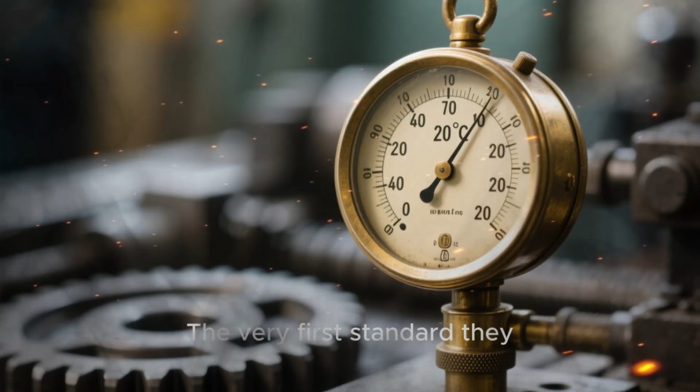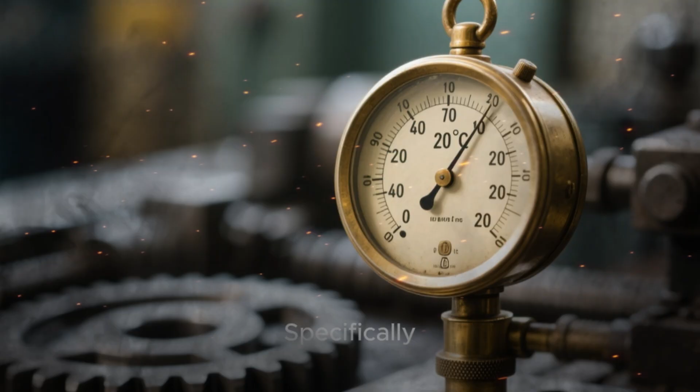This wasn't some flashy, high-profile event. It was a gathering of engineers and scientists who understood that for the world to rebuild and connect, they needed to agree on the small things first. And their very first task, the topic of their first ever meeting, wasn't what you might expect. It wasn't about threads or bolts or even wrenches. The very first standard they needed to agree on, which would become ISO standard number 1, was something far more fundamental. What was it? Temperature. Specifically, the standard reference temperature for industrial length measurements.

You see, metal expands when it's hot and contracts when it's cold. If you're measuring a part in a warm factory in one country, and your counterpart is measuring the same part in a colder factory somewhere else, your measurements won't match, even if you're using the exact same tools. This tiny difference could be enough to make a critical component fail. So before they could even begin to talk about unifying screw threads, they had to agree on the temperature at which all measurements would be based.

After much deliberation, they settled on 20 degrees Celsius, which is 68 degrees Fahrenheit. This became the bedrock upon which all other international mechanical standards would be built. It was a seemingly small decision, but it was the crucial first step. It established a common ground, a shared reality for engineers all over the world.

With this fundamental agreement in place, the stage was finally set to tackle the real beast, creating a single global standard for screw threads. This monumental task would lead to the birth of the ISO metric screw thread, the system that dominates our world today. But the path to that standard was anything but smooth. It was a story of fierce debate, national pride, and brilliant engineering compromises. And that's exactly what we'll dive into next time.

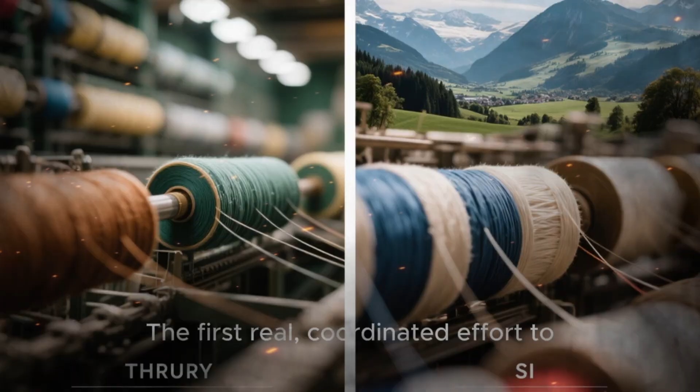Good luck with that. The first real, coordinated effort to standardize metric threads came from Switzerland in the late 1800s with the Thury thread, mainly for watches and scientific instruments. It was precise, but it was also complex and didn't scale up well for heavy industry. Then came the French with their Système International, or SI thread. This one was a big deal.

It had a 60-degree profile, just like the Sellers thread, and it was designed to be a comprehensive system for all sorts of applications. It gained a lot of traction across continental Europe, but here's the thing about standards. They only work if everyone agrees to use them. While Europe was slowly gravitating towards the French SI thread, America was all in on Sellers, and the British Empire was firmly committed to Whitworth. The world was divided into 3 major thread blocks.

This wasn't just an inconvenience. It was a massive headache for international trade, manufacturing, and especially for military alliances. Think about World War I and World War II allies trying to share equipment, repair vehicles, and supply parts, but nothing fits together. A British nut won't go on an American bolt. It was a logistical nightmare.

After the Second World War, the world was desperate for a fresh start. There was a huge push for international cooperation, and that included engineering standards. In 1947, the International Organization for Standardization, or ISO, was founded. One of its very first and most important tasks was to create a single unified screw thread standard for the entire planet. This was not going to be easy.

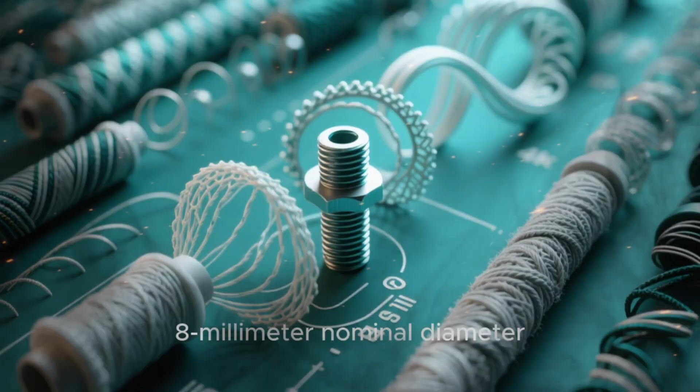They took the best bits from the existing metric systems, primarily the French SI and the German metric threads, and refined them. They kept the 60-degree flank angle, which had proven its strength and ease of manufacture. They created a logical, systematic series of diameters and pitches, designated by the letter M. M8, for example, means a metric thread with an 8mm nominal diameter. Simple, elegant, and unambiguous. The design of the M-series thread was a masterpiece of engineering compromise.

Unlike the Whitworth thread with its rounded crests and roots, and unlike the Sellers thread with its flat ones, the ISO metric thread has flat crests and rounded roots. The flat crests make it easier to manufacture and measure, while the rounded roots, thanks to a larger root radius, significantly improve fatigue strength by reducing stress concentrations. It was the best of both worlds.

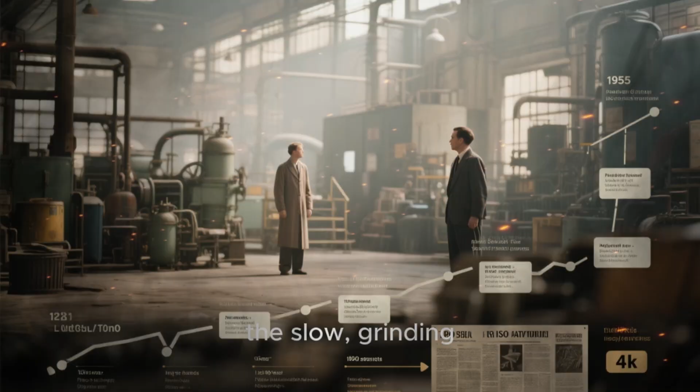The ISO published the basic standards for the M-series metric thread in the 1950s and 60s, and then the slow, grinding, decade-long transition began. This wasn't a switch that could be flipped overnight. It was a monumental undertaking. Think about it. Every factory in the world had to decide when or if to make the change.

For companies and countries already using metric, the switch was relatively easy. It was more of an update than a revolution. But for countries in the inch-based world like the UK and eventually the US, it was a different story. It meant redrawing tens of thousands of blueprints.

It meant retooling multi-million-dollar machines. It meant retraining an entire generation of engineers, machinists, and mechanics who had spent their entire lives thinking in inches, fractions and threads per inch. Manuals had to be reprinted. Supply chains had to be completely overhauled.

You couldn't just stop making imperial fasteners. For decades, you'd need to supply both for repairs and maintenance on older equipment. Garages and workshops suddenly needed two sets of everything: wrenches, taps, dies, and a dizzying array of nuts and bolts. The transition happened in waves.

Japan, a rising industrial power, adopted the ISO metric standard enthusiastically in the mid-1960s, a move that supercharged its export-driven economy. Cars and electronics made in Japan could be sold and serviced anywhere in the metric world with ease. This put immense pressure on other countries.

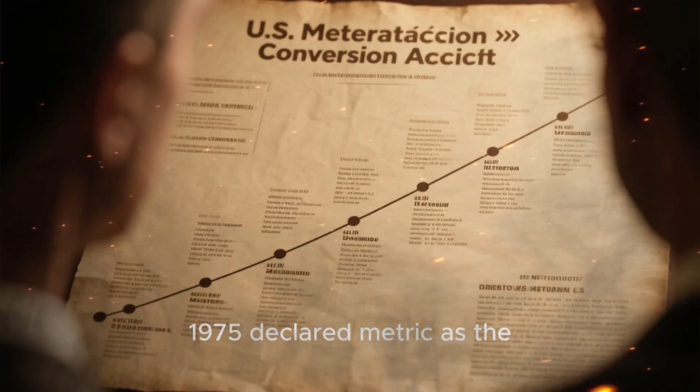The last major holdout was, and in many ways still is, the United States. The Metric Conversion Act of 1975 declared metric as the preferred system of measurement for U.S. trade and commerce, but it made conversion voluntary.

The U.S. auto industry began its slow shift in the late 70s and 80s, largely to be more competitive in a global market. But consumer resistance and the sheer cost of converting a continental-sized economy meant that the U.S. remains a place where both systems coexist, often to the frustration of everyone. If you've ever worked on a car from the 90s, you know the pain of needing both a 13mm and a half-inch wrench for the same job.

Today, the ISO metric thread is, without a doubt, the dominant global standard. It's the default for almost all new product design around the world. Its rise wasn't due to a single invention or a brilliant marketing campaign. It was a slow, deliberate, and sometimes difficult victory of logic and cooperation over tradition and regionalism.

It was the result of decades of work by thousands of engineers who understood that, for the world to connect, our machines had to connect first. And that connection starts with something as small and as important as the thread of a screw.

But the story doesn't end there. Even within the world of metric threads, there are variations: fine threads, coarse threads, and special profiles for specific jobs. In our next episode, we'll dive deeper into the M series, exploring why you might choose a fine thread over a coarse one, and we'll look at some of the specialized threads that hold our modern world together, from the pipes under our streets to the rockets that fly to space.

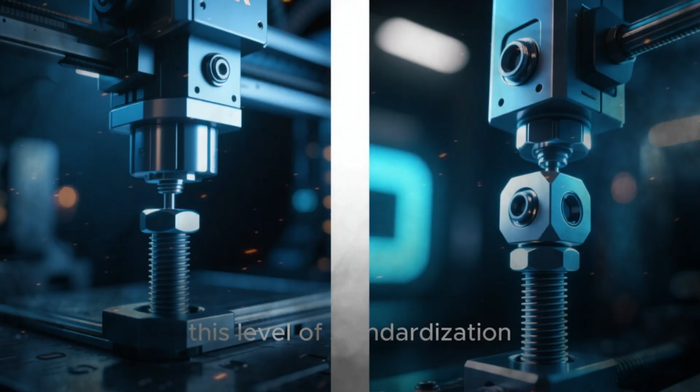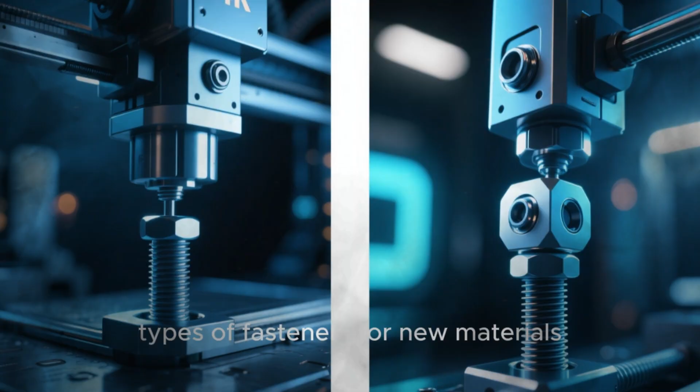It's the physical manifestation of a promise that the parts will fit, the machines will run, and our complex society will hold together. And while it may seem like the end of the story, this level of standardization and automation actually opens the door to new innovations and challenges. What happens when we need new types of fasteners for new materials, like carbon fiber composites? How does 3D printing or additive manufacturing change the game when we can print a custom bolt on site? The world of fasteners is far from static.